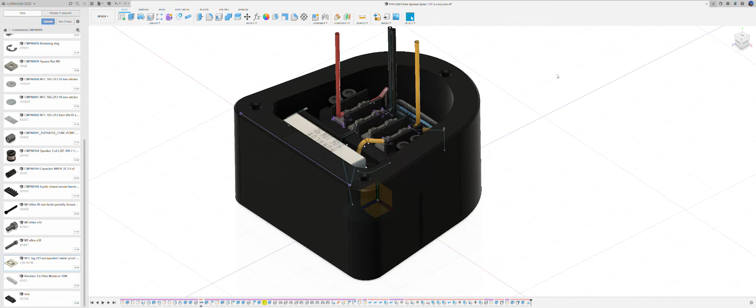Welcome to this short tutorial where we will show how to make a slot for an NFC tag in a vertical position with the help of Fusion 360.

So this is our part of our design. It's a crossover for a speaker system. We are thinking about placing an NFC tag here in the center of this design to be able to tap it and get product information and data from this.

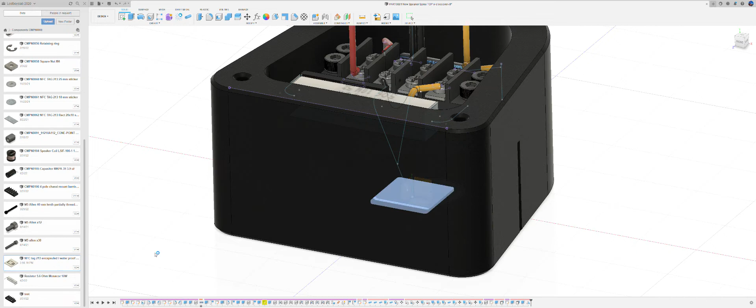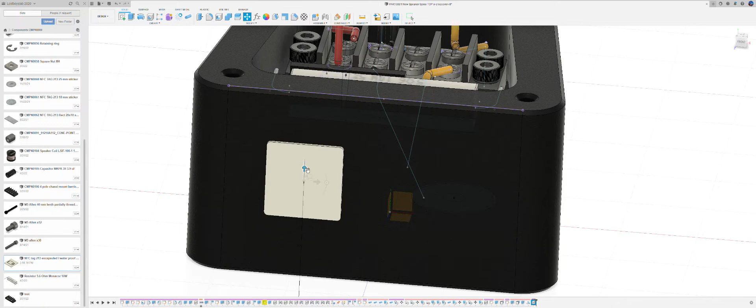Just to be very pedagogic, I will drag in a component which is actually the NFC tag. This is of course not necessary in a normal case, but it's just to get the component properly into the design, and of course getting it into bill of materials, and also for this demo I thought it would be a good idea to showcase this a little bit more.

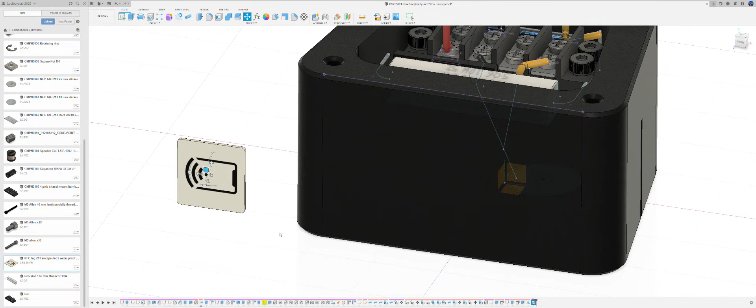So we would like to put it into the bottom module here. I actually highlight and select this module, and we create a sketch. We'll look at it from the front.

I will start by creating cross-reference help lines from here to here, and we will do one more from here to here. So obviously you can also model this from the top and down.

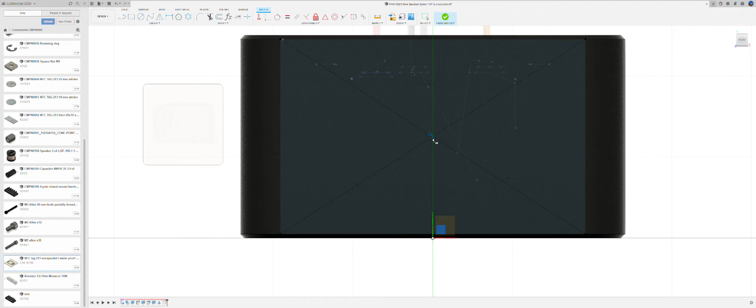I will model it like this just because I know the placement I would like to have. I take the rectangle center point and I take away the cross system. So you need to leave a little bit space for the design. These are exactly 20 by 20 millimeters, quadratic size.

I would recommend doing something like 21 or 22, depending on what nozzle size you're using. It can actually have some implications on the tolerances, but if you do 22, you are fine.

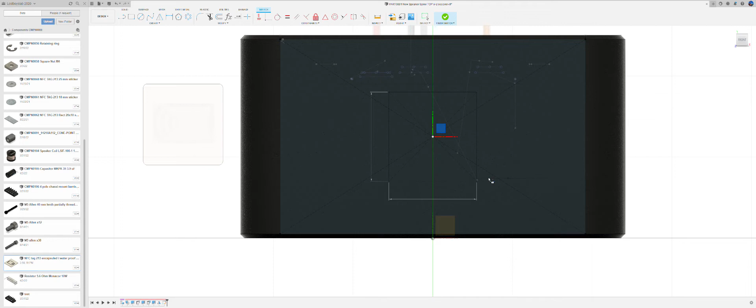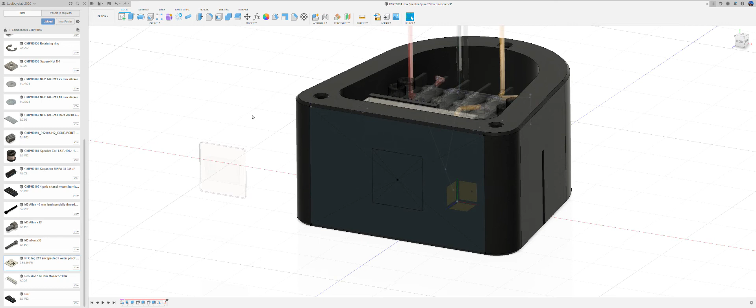Don't make too big slots, because a too big slot can have an impact on the fact that it will move inside your construction. And of course this PVC based watertight NFC tag does not have any glue or anything like this, so it needs to be slotted in with a pause on the printer.

So now I will actually decide how far in I would like it to be. First of all, the size of the slot, so it's exactly 0.88 millimeters thick. I will go something like minus 1.4 just to be safe that I can slot it in.

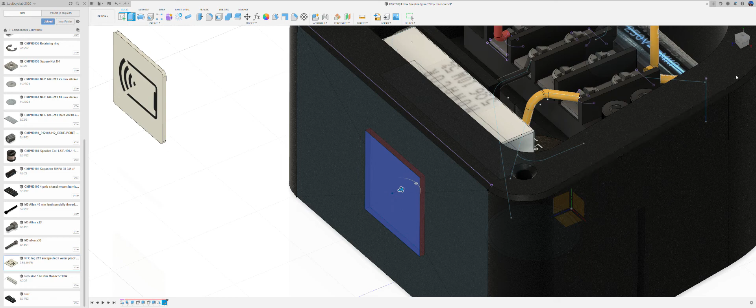And now, of course, with the offset tool, I can decide how far in I would like this to be in the construction. We need to put in minus 4, and now you can see from the top that this is fairly good. I don't want it to come too close because this is electrical stuff here, but minus 3, minus 4 millimeters is approximately where I would like it to be.

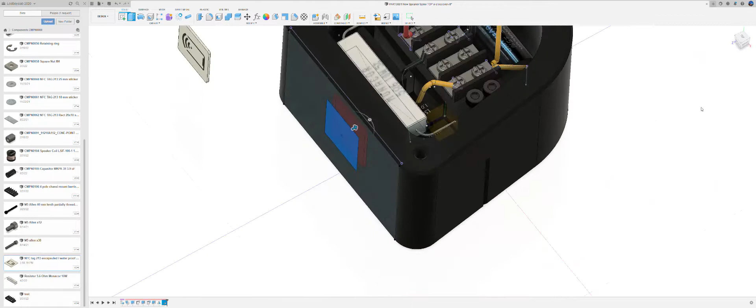So I say okay, and now just to show that we actually have this correct, let's switch on everything again. We make a section analysis from the top. And now here you see, here is the slot where it needs to go in.

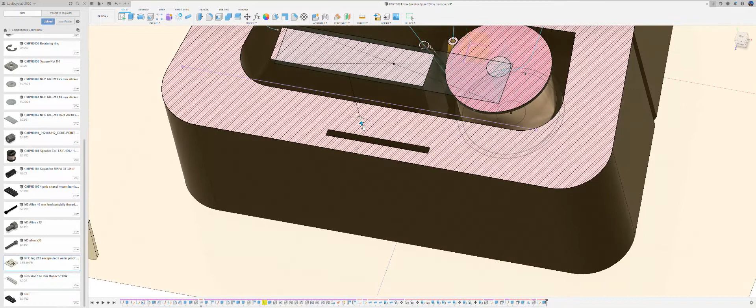And in the slicer, you will actually put a pause just here. And when the pause comes, you take the NFC tag and you slot it in, and it will be completely embedded into your construction. So thank you very much for listening.